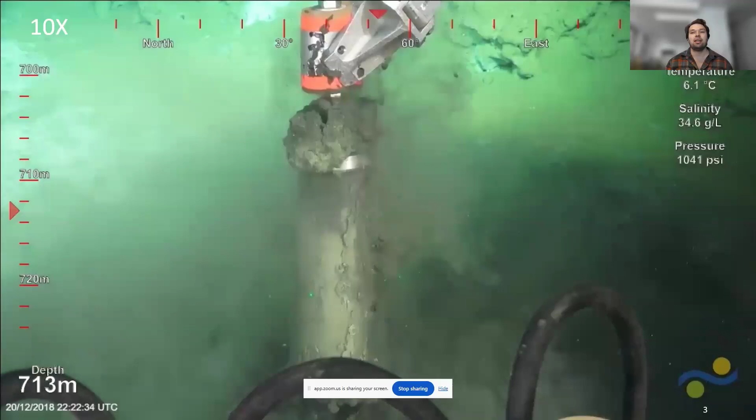But even this very simple task, you can see there's a lot of challenges for an automated robotic system. The dexterity required in the manipulator to pick up the tool, place it in the location of interest, and put it back in a very cluttered workspace. And also the act of sampling and interacting with the environment can kick up a lot of sediment and cause perceptual degradation that challenges automated systems.

Environments of interest are also often quite challenging by their nature. These are unknown environments going in - we don't have prior maps or knowledge of many of these environments, so we don't know what to expect. And often they can be structurally complex or visually complex, like this example here, where there's lots of bubbles coming off of this thermal vent. It's quite difficult from a perception perspective.

So there are many risks to deploying underwater robots compared to terrestrial systems. First you have the risk of environmental disturbance - that could be disturbing a delicate environment, but also the risk that disturbing the environment degrades your operational environment and makes it challenging to even operate. There's the risk of vehicle survivability. If something goes wrong, the vehicle can end up at the bottom of the deep ocean with no real way to recover, or imploded, with no possibility of recovery.

And then there's also risk of mission completion. If things go wrong, you may not complete your scientific goals for the mission. Many of these scientific expeditions are years in the planning, with very fixed ship time available, very expensive. And so if you don't get what you need out of it, it's a huge loss.

Compared to terrestrial systems, hardware underwater is very expensive to build. Operations are much more expensive. The observation of your system while it's deployed is very limited - you can't just look under the water and see what your system's doing. Again, hardware is prone to failure. Water is corrosive, at least marine water is, and these are high pressured environments. So it's not if things will fail, it's when things will fail.

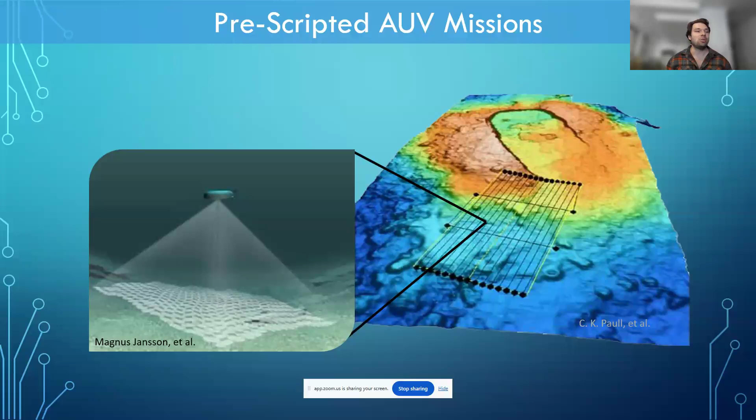Then you recover it and evaluate what went wrong with the system. So that leads to this general golden rule within marine robotics that first and foremost, number of deployments should equal number of recoveries. That's what we emphasize when we do field deployed robots.

So when you think of the design of underwater systems, they tend to be designed within an application-centric approach, where vehicles are highly specialized for what their intention is. When you break that criteria down, you tend to arrive at two very distinct types of systems: autonomous underwater vehicles, which tend to be hydrodynamically efficient, designed for doing survey, and intervention systems that are designed to operate by a tether from a ship with pilots in control of them.

However, if we're designing vehicles for exploration of remote or extreme environments, it requires a bit more of a hybrid approach, because you cannot rely on a tethered vehicle to go and collect samples very far under ice or on an alien world. And you also cannot rely on very strict, rigid, mission-planned regimes to operate if something goes wrong in an environment where you cannot surface or recover.

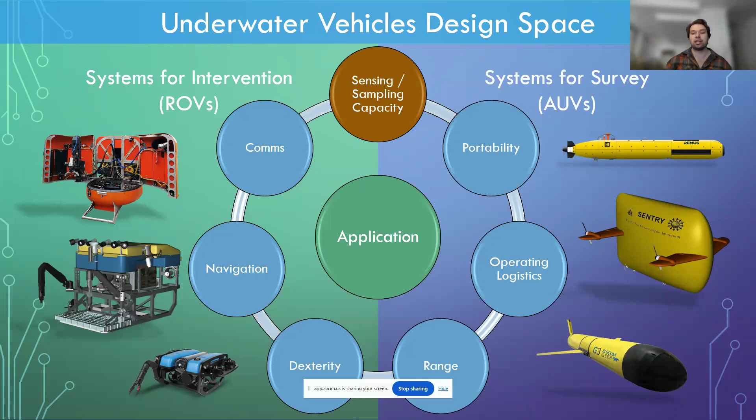So this leads me to the project that I alluded to that started all of my marine robotics research, which was this NASA-funded PSTAR project that I was offered to join at the beginning of my PhD. This was a collaboration between my home University of Michigan, the ACFR, which is how I was first introduced to the marine group here, Woods Hole Oceanographic Institution, and MIT.

And so this PSTAR program funds terrestrial-based research towards developing technologies that can enable future space exploration missions.

NASA is interested in this because one of their primary goals is to search for life outside the bounds of our Earth. In our deep oceans, we have these thermal vent systems, which I've alluded to before, and these vent systems are driven by geothermal processes in the core of the Earth, which cause chemical vapor, hot vapor, to come out of these vents in the deep ocean.

There's a kind of bacteria that lives on these vents that was only discovered within the last century. Instead of relying on photosynthesis, which most of the life we're familiar with does, they can fixate carbon dioxide directly from these vent systems into energy, through a process called chemosynthesis. Those bacteria in turn support a whole pyramid of life that thrive in the deep ocean where no light can penetrate.

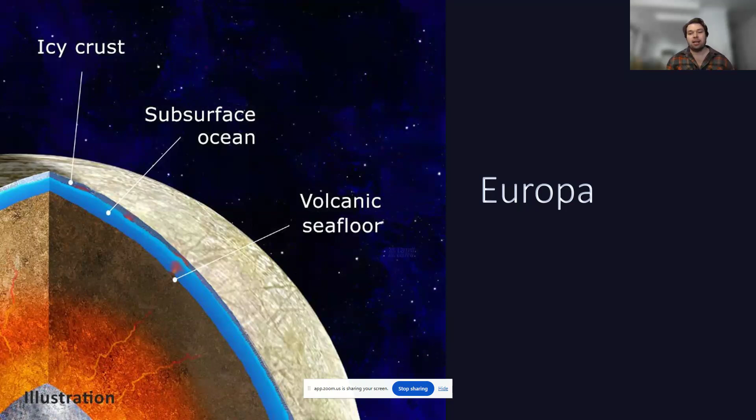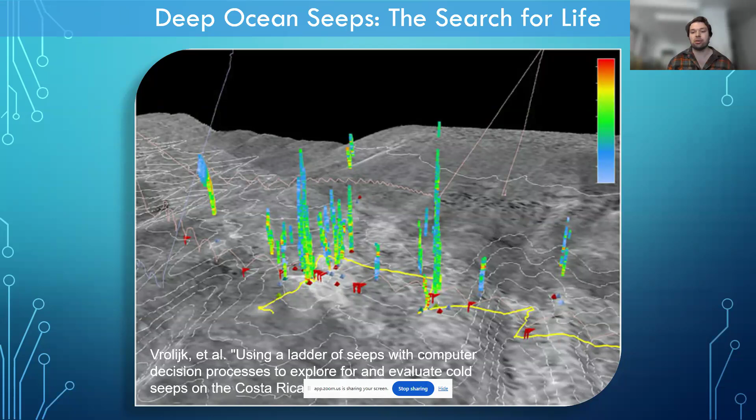So my work as part of this project was really focused on increasing the autonomy of an ROV system as an analog to a lander. In an environment like Europa and Enceladus, there is no way to do any kind of direct control of the vehicle. It's going to be on its own. So it needs full autonomy capability.

So I worked largely through my PhD with this kind of specialized ROV system called NUI, Nereid Under Ice. Traditional ROVs use a tether for both power and communication. So they're tethered to a ship with a very thick tether. And then to minimize the dynamic loading between the ship and the vehicle from the tether, the ship has to station keep directly over the vehicle. So this limits traditional ROVs, large ROVs, to operating in open ocean areas where ships can access.

The NUI vehicle is a hybrid ROV that carries all its power on board. And instead of a large tether, it only has a hair-thin fiber optic tether that spools out between the ship and the vehicle and just supplies communication. So it can still be teleoperated, but because it's a hair-thin tether, it can spool out for kilometers and the ship can stay in place and the vehicle can move away from the ship.

The kind of design inspiration for this vehicle was to access under ice shelves and start to be able to kind of get under there and collect samples and do some intervention. So this vehicle can operate in an AUV mode. So if the tether breaks, it can home its way back to the ship. And there's also, you can do some level of wireless communication through optical and acoustic modems.

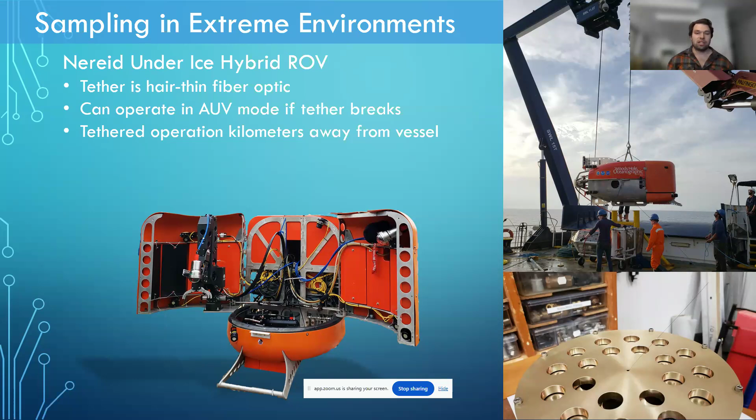All right, so a massive challenge for automating underwater intervention systems is the perception problem, which is my particular interest. The image formation process in underwater environments is nonlinear. It's subject to many degrading imaging effects. And again, operating intervention systems in close range to the environment also risks environmental disturbance and degrading your scene.

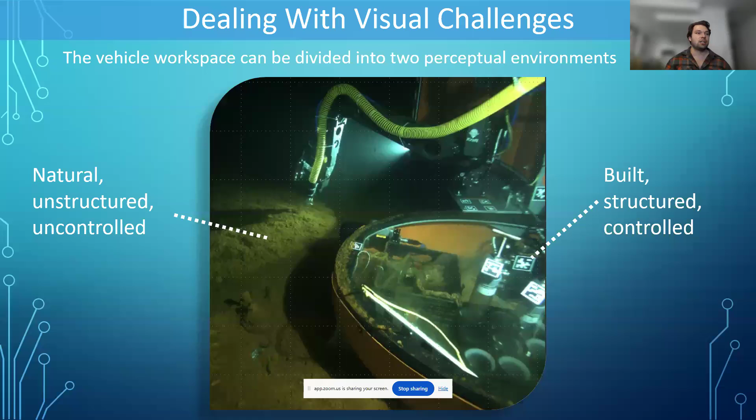Within the scope of this project, I worked on several different vision problems. So I'll kind of briefly talk about some. But an idea I leveraged heavily within my work is that your workspace can kind of be divided for an intervention vehicle into two perceptual environments. So you have your unknown environment, which is generally unstructured, uncontrolled, and highly uncertain, in an unexplored and new location. And then you have your known environment, which exists within your structured and controlled workspace of the vehicle. And within that controlled environment, we can also have prior models of things like tools and your vehicle itself.

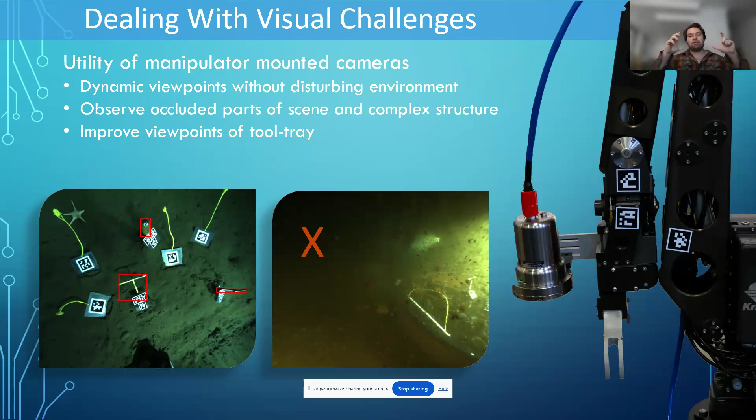And then a second idea I explored in my work is the use of manipulator-mounted wide field of view fisheye cameras. So wide field of view can enable dynamic viewpoint acquisition without needing to move the vehicle around, which for large ROVs was a big advantage because the thrusters on large ROVs, if you try to lift up and move location, they completely degrade the whole scene. You have to wait minutes for the sediment to settle down. And also that manipulator-mounted camera proved to be advantageous for detecting and grasping tools within the confined space of your workspace, where vehicle fixed mounted cameras don't see your workspace very well.

So just very briefly, I'll go over a few of the problems I worked on within this context.

One of the first things I worked on was an object pose estimation method specially adapted to underwater use, which I called SilhoNet. This method would predict silhouettes, essentially a segmentation mask of the object. But if the object was occluded, it would fill in the silhouette to be the full silhouette of the object in its current pose, which could then be used to estimate the orientation of the object. This proved to perform very well compared to methods at the time.

It ran on top of an object detection method that could take a region of interest and a class ID as input. This method was inspired by having known prior models of your tools within your workspace that you were trying to detect and manipulate.

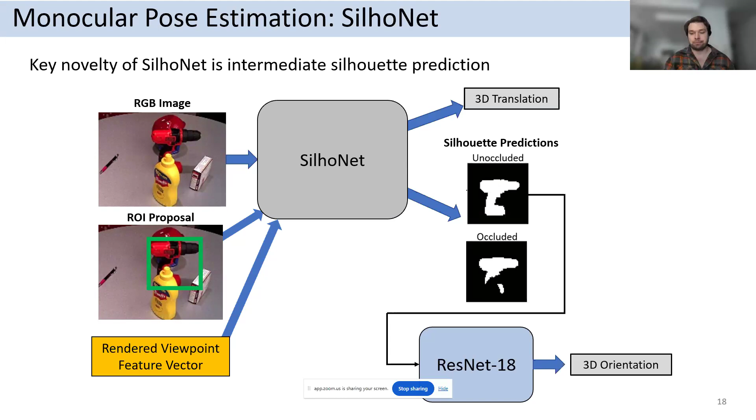I then took that work and extended it to work on fisheye cameras, for cameras mounted on a manipulator with underwater imagery. One challenge with fisheye imagery is the large distortion space. If you take an object and translate it without rotating it, then take a region of interest crop around that object, the apparent rotation will look very different depending on how you translate it. This was a challenge for traditional pose estimation methods, which try to predict directly the orientation relative to the camera frame and the translation.

In this method, I used the gnomonic projection, an old mapping used for navigation maps, to map onto a sphere what I called an apparent viewpoint of the object. I could then do object detection and pose estimation within the frame of that apparent viewpoint, and then do an inverse projection back to the fisheye frame to get your camera-relative pose and orientation.

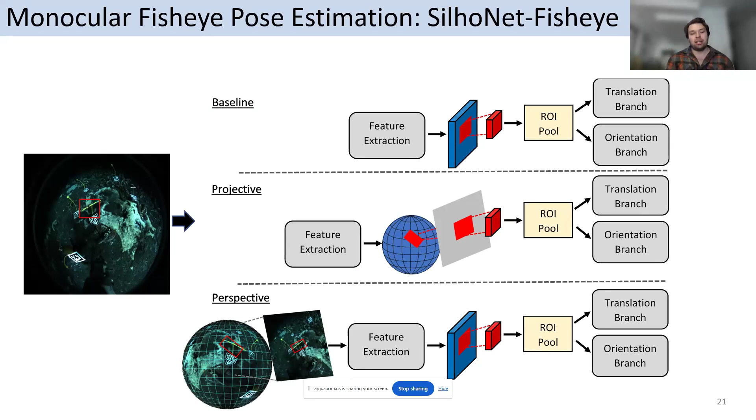I did some analysis of different ways of using that gnomonic mapping operator within a neural network architecture and found an approach that performed best. As part of this work on the Costa Rica shelf break, I collected a dataset. Nowadays it would be considered very small scale, but it was enough to train the method on underwater fisheye data and evaluate it, showing reasonable performance for grasping and manipulating objects.

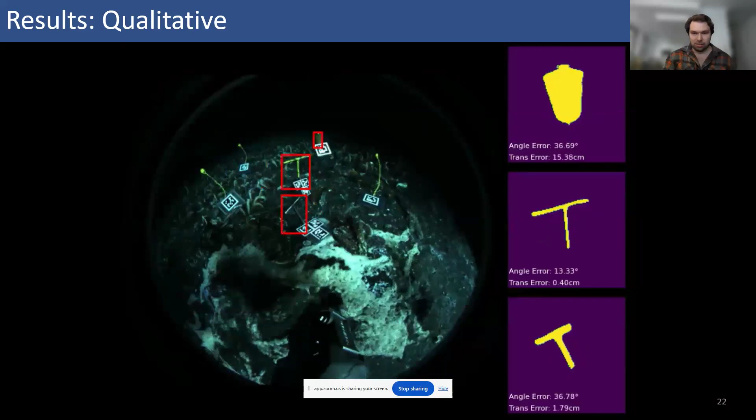That was one problem I worked on during my PhD. Another problem I looked at was how you can co-register cameras mounted on the vehicle with the camera mounted on the manipulator. On the vehicle, we had perspective regular stereo for good depth maps, but with a limited viewpoint and strong features, and then the fisheye camera on the manipulator, which is a much different camera model.

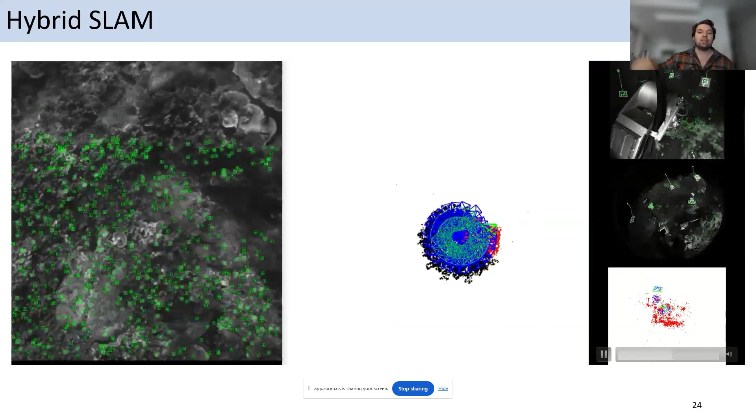Here's a little video snippet of that working. On the left is a stereo sequence from Lizard Island that we collected, used for preliminary evaluation of the method. On the right, it shows the mapping from a deep ocean dataset where the fisheye is being registered into the stereo view. On this large vehicle, the stereo is pretty much stationary since you're not moving the vehicle around, but the fisheye is able to extend the view and see around the occluded spaces of the scene where the stereo can't.

So that was a couple things I worked on the perception side. On the hardware side, at the same time, I worked on building an autonomy framework that could seamlessly integrate with the teleoperated system that the pilots use. This framework could enable an operator to assign high-level pick-and-place style tasks, with execution broken down into sequences of motions that could be visualized to the pilot. They could override them and verify they were safe, which reduced the risk of testing and deploying this autonomy stack on a very expensive vehicle asset.

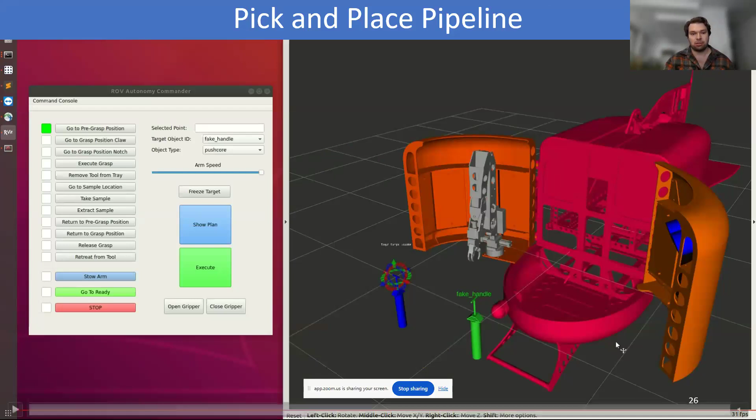So using this, this was the very first basic thing that I did, a simulation, a pick and place pipeline. Part of this was to build a pipeline specialized to underwater tools, and also keep very transparent the things a pilot would want to know was happening in an underwater system.

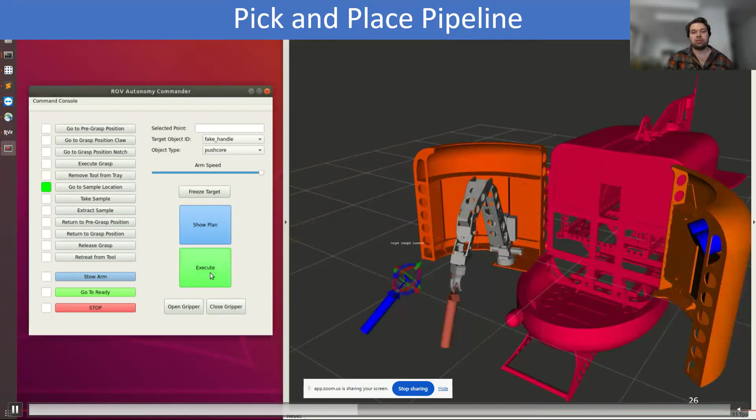This was a preliminary simulation leveraging MoveIt to build this system to do push core sampling, which was the first task that we tried to implement.

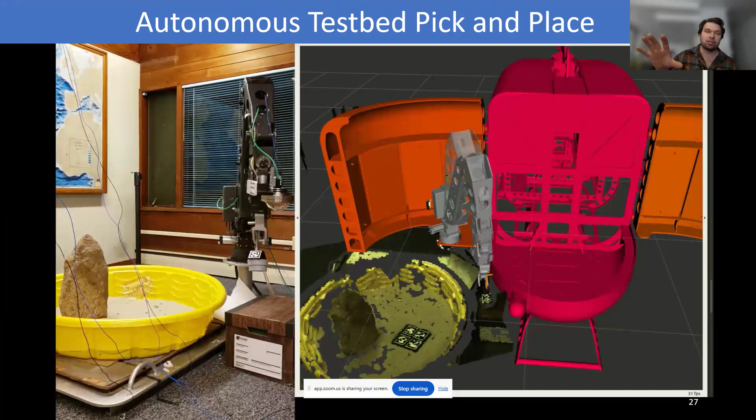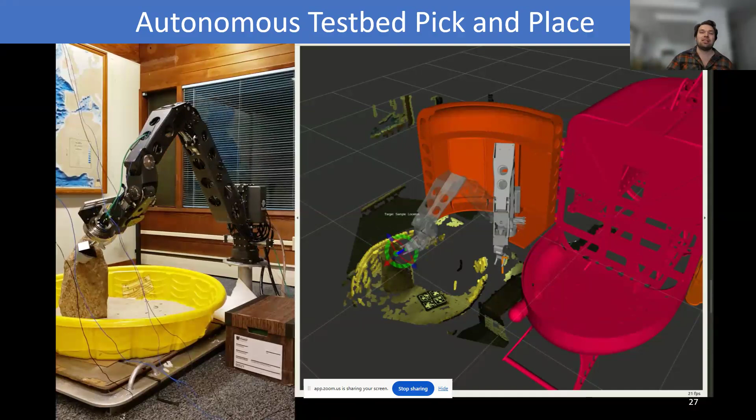This was the first demonstration of the full pick and place pipeline working in a lab setup. It had a very simple setup, but this was also all done on a hydraulic manipulator built in the 70s, not built for automation at all, so there were a lot of control challenges around getting the accuracy needed to actually automate this thing.

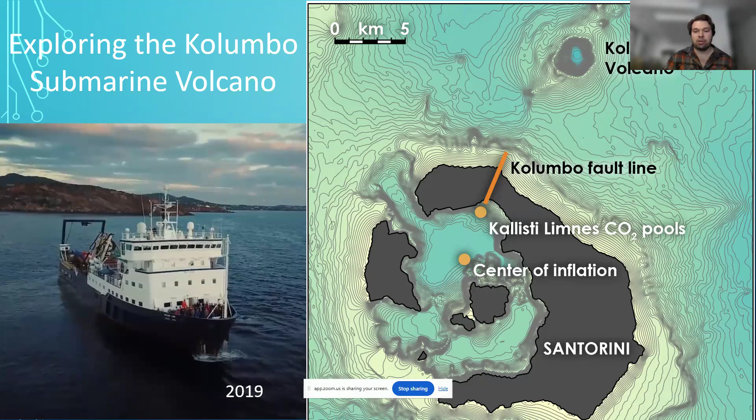In 2019, I participated in a field expedition where we used this vehicle to explore the active submarine volcano Kolumbo, a volcano off of Santorini in Greece, and we were able to demonstrate planner-controlled biological sampling at 1,000 meters deep.

Unfortunately, as is always the case in field work, the manipulator's slew joint, the rotation joint, was having issues, so we couldn't precisely control the manipulator. But we were still able to get published first, with a planner controlled collection of a material sample using this slurp hose, which is kind of like a large vacuum cleaner. There was no pilot in the loop - we just pressed some buttons and had the manipulator collect a biological sample.

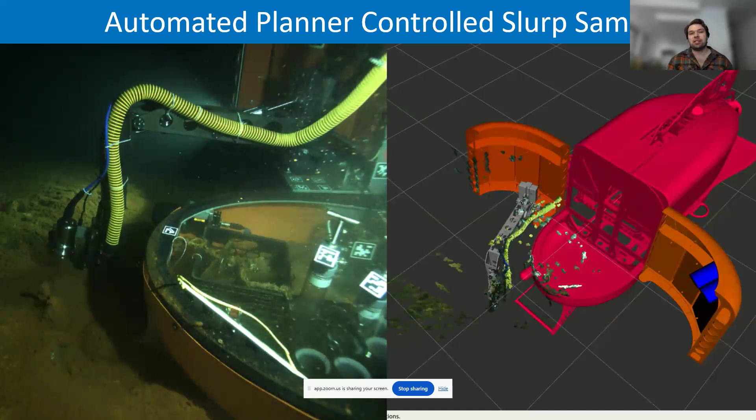You can see here an example of the challenges of these kind of environments. The whole seafloor in the caldera is just thick bacterial mat, and anytime you try to collect a sample it just kicks up tons of sediment, which made the visual side of things very, very challenging.

We also did a very preliminary demonstration of natural language control of this system. In collaboration with Matthew Walter, who's at Toyota Technological Institute at Chicago, we demonstrated a natural language interface that allowed you to put text commands or speech commands to the autonomy system, and it could essentially reproduce any of the pick and place pipeline commands. That was preliminary work during my PhD.

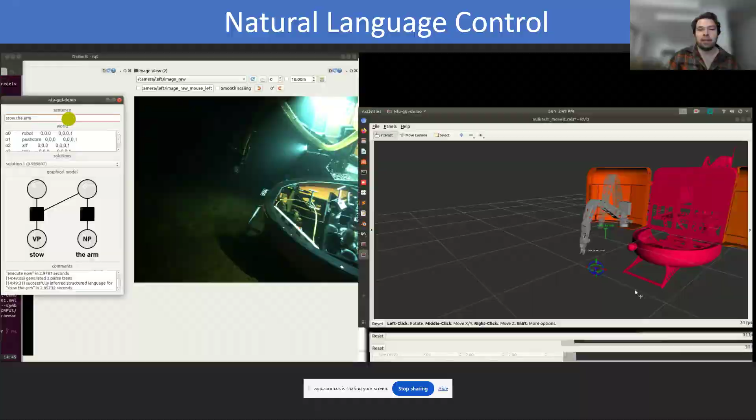Towards the end of my PhD, and then in my postdoc at Woods Hole Oceanographic Institution, we started extending this work. A big challenge for conducting deep ocean science is that currently vehicles capable of operating in the deep ocean are very few, and they typically require large ships to support operations.

The cost of operating these vehicles is generally on the order of 50 grand or more per day. The berth spaces available on these ships are very limited, and you also have a very tight operational window to collect your data and samples. This motivated expanding this autonomy framework to a system that could enable any number of both ship-based and shoreside scientists to engage with the vehicle operation in real time. Rather than just waiting on shore for the mission to be completed, you can be actively engaged with the process of collecting those samples.

So we built a networking framework around our core autonomy system. This had a 2-server architecture where we had a field server that interfaced directly with the vehicle's autonomy framework. The vehicle ran ROS, and then that field server encoded data into a lightweight messaging library, ZeroMQ if you're interested, and then that was transmitted to the shore server.

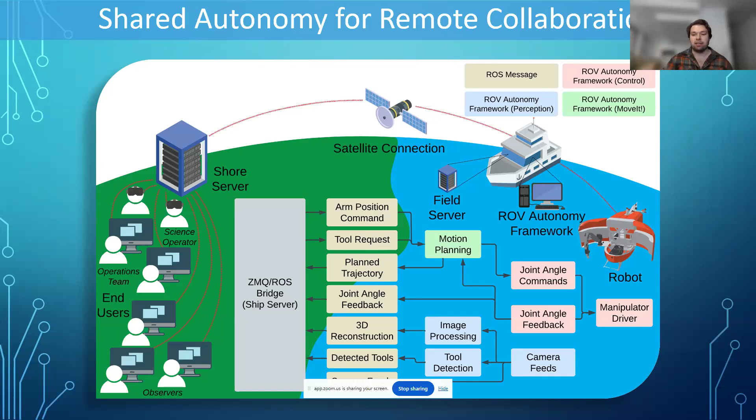In 2021, we took this system and demonstrated it in a field expedition off the west coast of the US in California. Myself and Matthew Walter were on the ship, and we had a team of others involved in building this system: Andre Daniello, Amy Phung, and Dr. Richard Camilli at Woods Hole, who was leading this work.

In 2021, we had developed both a desktop interface and a virtual reality interface into the system. Our major emphasis was on the development of this virtual reality interface, which supported both hand gesture input and natural language commands. The demonstration was a multi-step collaborative sampling task where we used a device called an X-ray fluorometer, which Richard Camilli developed, that could measure the elemental composition of materials in real time.

In this demo, Matthew Walter initiated an automated pickup of a tool command using a spoken command. Once the system grasped and removed the tool, Amy Phung, using the VR interface, was able to position it precisely where we wanted to collect the sample.

And then in real time, Rich Camilli was able to look at the data coming through the XRF and give feedback on where the tool was positioned. Then we were able to finish the sampling process and recover the tool with no pilot in the loop. This was all controlled by people thousands of miles away from the system.

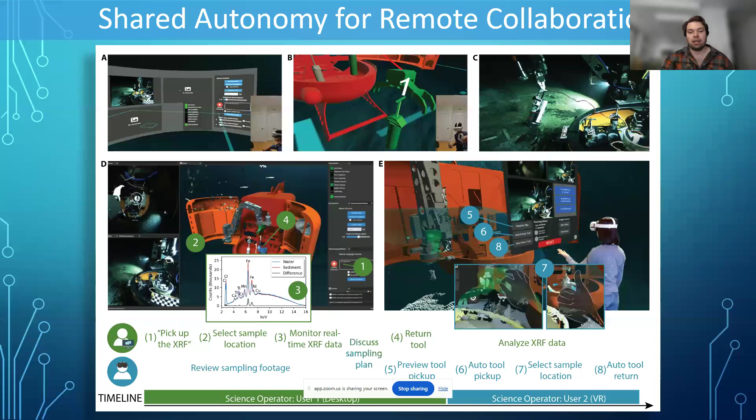So that was a pretty cool success. So then we took the lessons learned from that and improved the virtual reality interface. And then we set up some trials at the lab where we could conduct user studies to evaluate and demonstrate how novice users could operate the VR interface with precision enabled by the autonomy framework. So this is just an example of that VR interface and what that looked like.

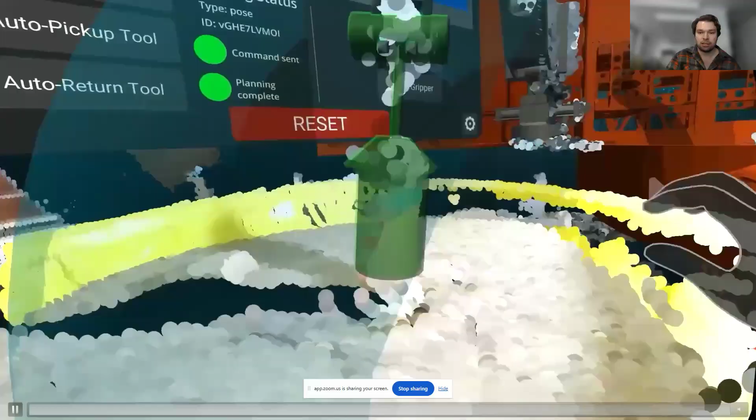So we conducted a set of user studies that involved two representative tasks of things you do with an underwater system. One is picking up a block and putting it in a basket, like collecting a rock sample. The other was taking a push core out of a quiver and trying to place it in the center of a target, then putting it back in the quiver. We evaluated how accurately the user could position the push core on the target.

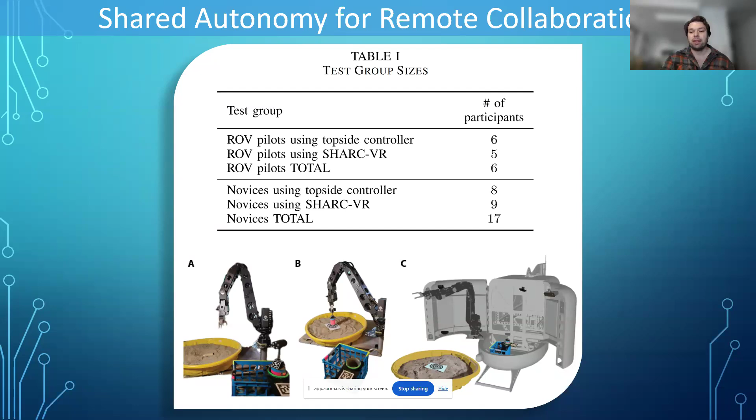We had a pool of users that included both expert pilots from the Woods Hole Oceanographic Institution, who had lots of experience controlling underwater manipulators, and also a pool of novice operators who had never seen or touched an underwater manipulator before. These were time trials.

The big takeaway from this was that under reduced frame rates, represented by delay or bandwidth limited communication, we found there's an exponential increase in the expected time for both novices and pilots to complete a task as your frame rate decreases.

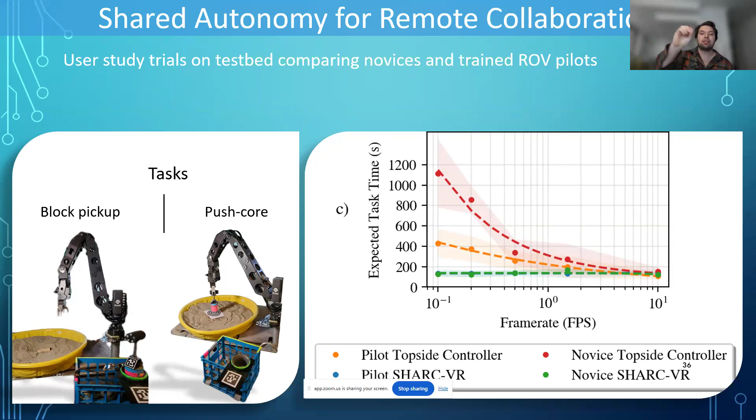This result was consistent with Sheridan's observation 60 years ago, where he noted that under delayed communication, users directly teleoperating a remote system tend to opt for making small open loop adjustments and then waiting to see the response of the system before making another iterative adjustment. Whereas with the autonomy system, it's able to close the loop in a delayed communication setting, so you don't need to make those iterative adjustments that lose time.

We also found that both novices and pilots were more precise with their push-core sampling than with the direct joystick operated approach to manipulation, the traditional approach. And I also found that my aunt could operate it very easily and with very little training.

Okay, so that wraps up my discussion of that first project funded by NASA, towards automating these underwater intervention systems. We're still doing a lot of work currently building off of that, and I'm actively involved with several projects here at the ACFR in that space. So now I'm going to move towards talking about another project I got involved with during my postdoc at the Woods Hole Oceanographic Institution.

This project was motivated by long-range exploration under ice. Currently, we don't really have good systems that can go fully under ice shelves. There are a few, but in general you require a vehicle with very high range. We're talking, we don't want to just go 10 kilometers or even 100 kilometers, we want to go 1,000 kilometers under ice. There are very few systems that can do that.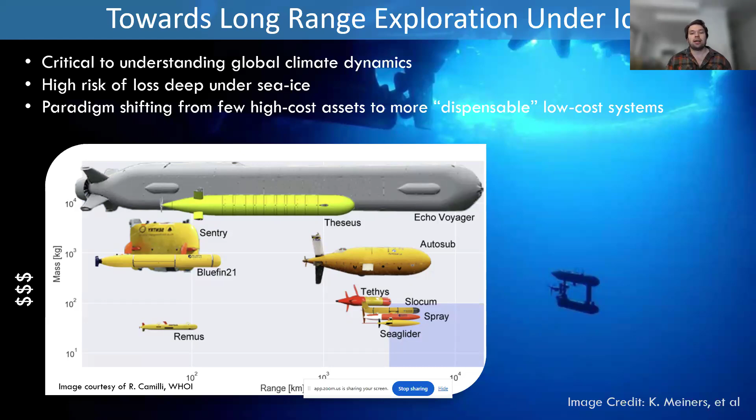...are not very big, but can go super long range, and those are gliders. If you're not familiar with gliders, they're a special type of autonomous vehicle that can fly essentially through the water column on wings, using buoyancy drive instead of thruster drive as their primary propulsion method. Gliders can go both positive or negatively buoyant, and traditional ones can go 1,000 meters or more in water depth, gliding in a yo-yo kind of pattern through the water. That means gliders only need to burn energy when they change their buoyancy at the bottom of an inflection to go positively buoyant. So these vehicles can go super far and operate for very long duration.

Because they're so power efficient, and still limited in battery capacity from their size, gliders tend to operate very low power sensors that can be turned on and off. Traditionally, gliders constrain their navigation by getting GPS fixes at the top of every yo cycle: start with a GPS fix, do one long dive through the water column, come up, grab another GPS fix, and that constrains their navigation drift.

There's been more interest in leveraging these vehicles for long-range exploration under ice, but that breaks the traditional way you operate these systems, because under ice you can no longer surface for a GPS fix. You also end up depth constrained—if you're under the keel of an ice floe, you may not have full water depth for an efficient yo cycle. So it requires a system that can navigate accurately enough to get under the ice and back out without surface fixes, and also fly in narrower depth bands depending on the keel depth of the ice.

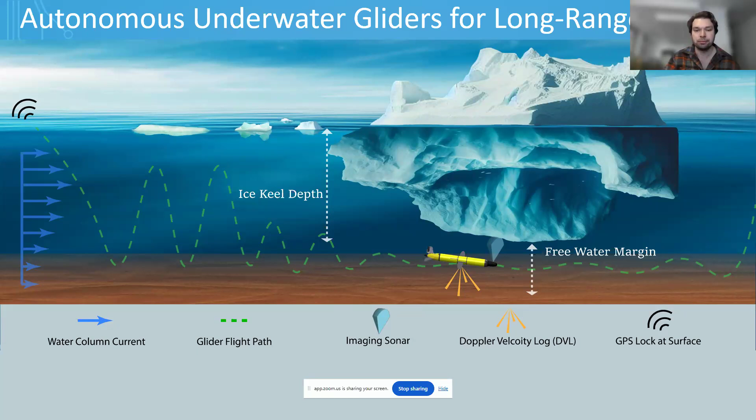In this project, I worked with Dr. Richard Camilli on developing this long-range underwater glider, modified from a stock Slocum G3 glider. He did some work modifying the wings and tail of the glider so it could fly more efficiently, and also built a custom thruster more efficient than the stock thrusters. So the glider was able to operate in hybrid mode, seamlessly transitioning between buoyancy drive and thruster drive.

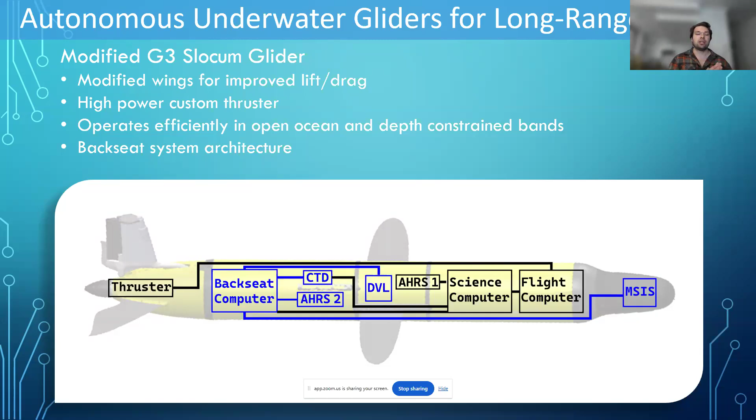We built this backseat architecture system that could interface with the flight computer, so you could fly the glider as a stock system or leverage this backseat architecture. That backseat had a DVL, a mechanical scanning sonar in the nose of the vehicle, a CTD, and an AHRS—those were the key sensors we integrated into the stock system.

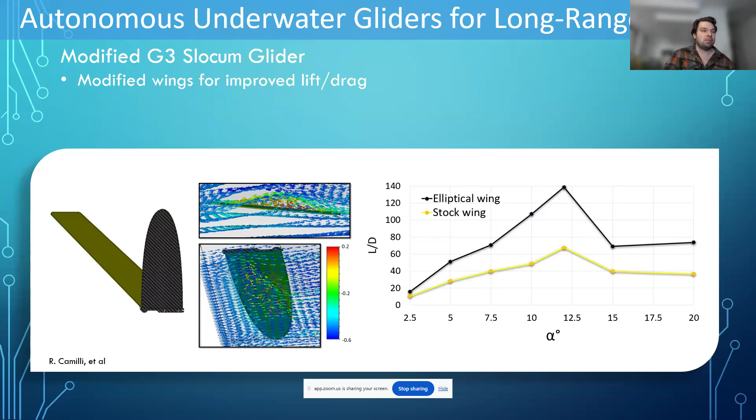This graph shows the improvement of the flight dynamics from the modifications. A simple modification to the shape of the wings significantly improves the lift to drag ratio. Again, everything on gliders is about improving efficiency and minimizing power loss.

Richard Camilli did some analysis on the different operation modalities for gliders. What we found is if you're in full ocean depth with low hotel load, meaning you're not operating many sensors, just collecting sparse oceanographic data, then you're most efficient flying with buoyancy drive, yoing through the water column. However, if your depth band becomes constrained to less than 100 meters, actively cycling your buoyancy drive becomes less efficient than just driving by thruster with neutral buoyancy.

If you start operating a hotel load of sensors—say you want to run the DVL and mechanical scanning sonar at 15 watts, which is actually quite low for a sensor hotel load—then the depth band where thruster operation becomes more efficient extends to 300 meters. So gliders are most efficient when they can leverage the full ocean depth, but if you're really interested in operating in a constrained depth band, you want to use this hybrid thruster modality.

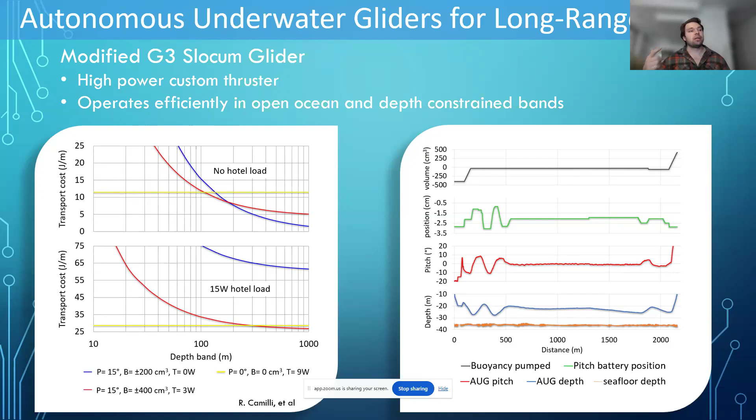Based on our stock glider modifications, we ran some numbers where we looked at transit mode—coastal transit mode, where all unneeded sensors are turned off and just navigation sensors run—and survey mode, where you're running the mechanical scanning sonar and all sensors you want to collect data with. What we found is that with full sensor payload, we could get a range of 1,500 kilometers in a constant depth band, thruster-driven mode.

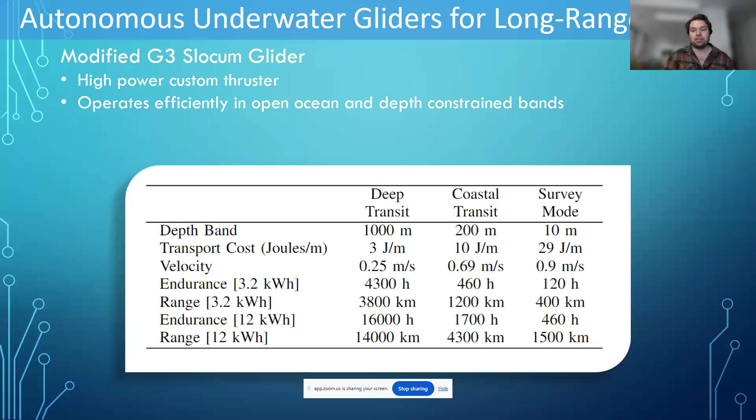It used a very simple ROS system implementing a navigation mode and a mission controller, which can communicate to the stock computer and update its mission parameters on the fly. I also worked on implementing a DVL odometry process that could dynamically profile the water column currents as the glider flew. Anytime the glider got bottom lock with the DVL, it could update its odometry estimate and correct for water column currents dynamically—since we're often starting the glider in very deep water where there's no DVL bottom lock, then flying closer to surfaces to do profiling and survey.

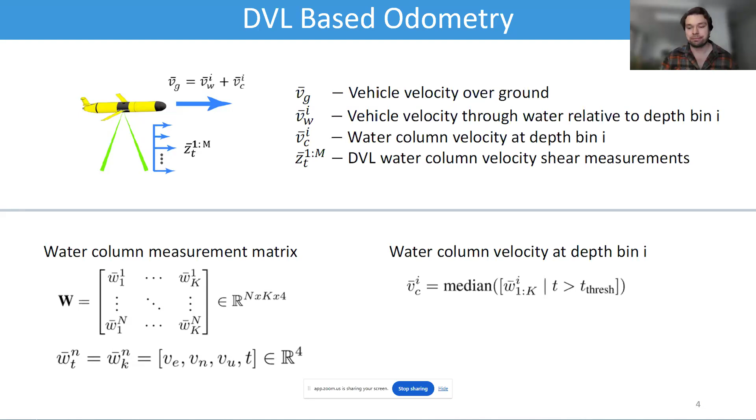For operation under ice, we had funding to do some operations in the Arctic, in what's called the MIZ, the marginal ice zones. One challenge was very little keel depth between the ice and the seafloor. We also needed a mission architecture that could safely navigate under ice and back out, where if something happened like an abort, the glider wouldn't try to surface under the ice and potentially get stuck. So we developed this backseat, front seat mission architecture that could handle abort cases under ice.

We implemented this carrot following approach to the mission controller, where the backseat ran this improved navigation stack that had a better idea of where the glider was based on this DVL odometry process. It would feed carrot positions based on the front seat's estimate of where it should go. It didn't touch the front seat's stock implementation, but it worked with it to fly the glider.

We spent 2 weeks in the Arctic out of northern Alaska, living on this boat with 5 other people. We used a kitchen pot as a shower off the back of it. And we conducted some surveys with the glider under the marginal ice zone.

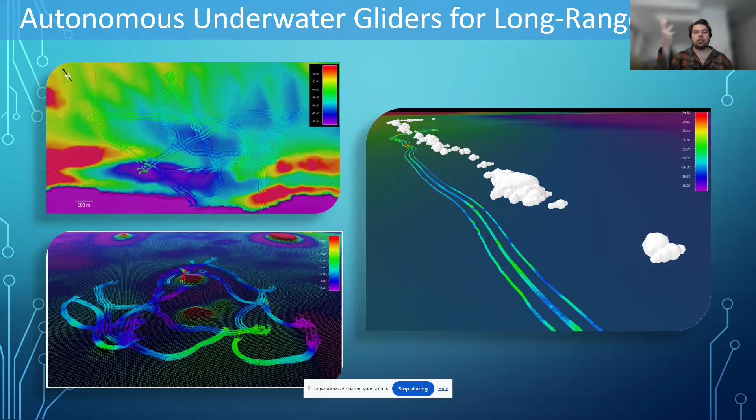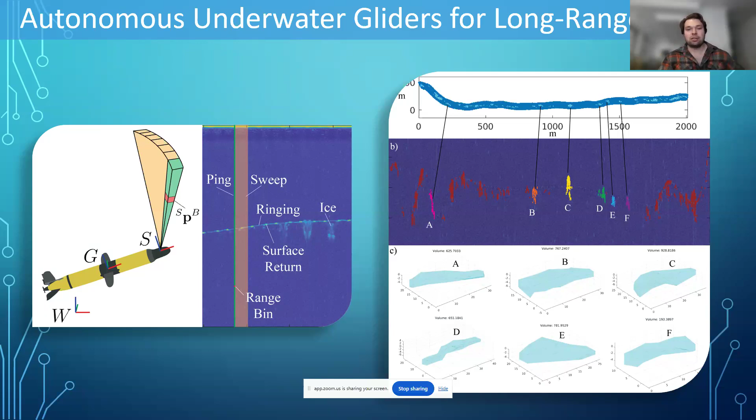We were able to show that when the imaging sonar was configured in an upward looking sweep, we could detect and characterize chunks of ice in the water. These graphs show the signal of the ice chunks in the sonar return. We were even able to integrate these signals into volumetric estimates of the ice cover. This was work that Amy Fung did, who I've worked with a lot in these past projects.

That brings me to the end of the 2 main things I wanted to talk about, the 2 main projects. But I'll just talk a little bit about what we're currently doing. This slide kind of captures a bit of my philosophy for how I think about the field robotics research that I'm doing.

I call this my subsumptive approach to perception for field robotics. It's inspired a bit by Rodney Brooks, who had this idea that intelligence is an outcome of levels of competence in a robotic system, which has varying views on whether or not that's actually proved to be legitimate. But I think these points really apply to field robotic systems, and I think of it instead of intelligence as autonomous capability.

For me, in my mind, field robotic systems should be situated in real time for real-time response to the environment where they're operating.

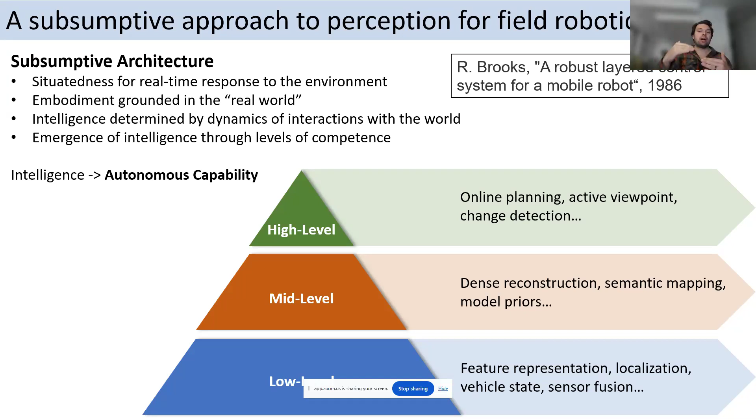Whenever I'm working on one level, I think about how I can leverage the levels below it. That leads to one of the problems that's been a big focus for the last couple of years with research that I've been doing here at the ACFR: how can you leverage your real-time sparse SLAM maps that you're building for dense depth prediction?

This was something that I was thinking about in my PhD. The idea is that your SLAM map provides you with very strong depth priors, and that can enable improved depth map, metric depth mapping from both monocular images or even stereo images.

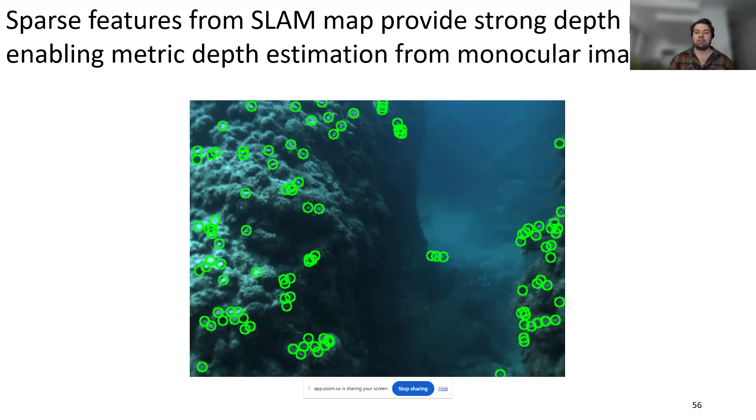I had a master's student that I was co-supervising 2 years ago, and he took this work and ran with it a bit. There was some recent work on monocular depth estimation coming out at the time. He looked at how you could represent these sparse depth points as a densified representation of a depth map prior, and then how you could fuse that into a metric depth estimation network using monocular relative depth plus that sparse depth prior map. He was able to show some really promising preliminary results.

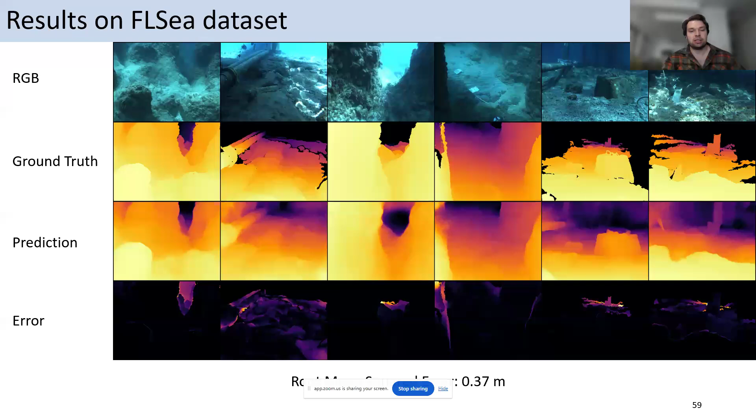Around the same time, ZoeDepth came out, which showed incredibly strong single shot performance on underwater data without any training on underwater data. And then you have Depth Anything V2, which came out, and you can give it a very turbid sequence where a conventional depth estimation method would be very poor, and it can actually put out something sensible.

This inspired some work that was done over this last year with a student that I'm co-supervising, Jay Zhang. We just submitted for publication this method called SPADE. This method is built on a monocular backbone like Depth Anything V2, and then it can leverage sparse feature priors, which can be from stereo or VINS or any kind of SLAM process. It can do a scaling operator on the second stage, and then have a third stage network that refines the depth prediction to produce a metric depth map.

We showed that this can run at 15 frames per second on a Jetson Orin, which is the kind of device that we're running on our vehicles. Very promising results for running real time on our underwater systems.

Another thing that we've been up to in lab that I've been heavily involved with is the Seeker AUV, which is a highly maneuverable AUV designed for benthic survey. We've been working on developing this vehicle over the last 2 years, and we've gone from prototype to having several vehicles built and operated all over the South Pacific, most recently in the Solomon Islands, where I did some field work for a month.

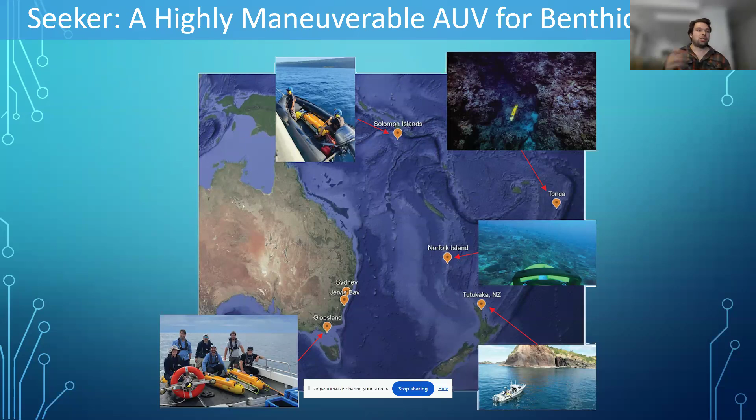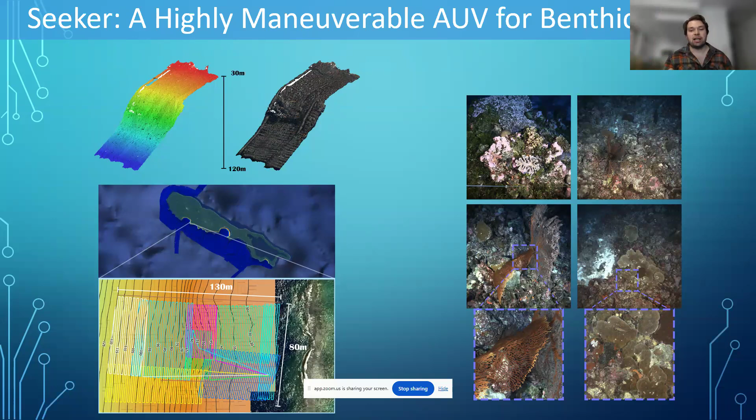We demonstrated with 2 vehicles doing, this is just one of the surveys that we did, a very large scale survey, doing benthic imaging, and then combining all of those imageries into a large scale photo mosaic. This photo mosaic is about 10,000 square meters and extends from 30 meters deep down to 120 meters deep. This vehicle has been designed specifically for high quality imagery.

The lighting and the imagery provides very high resolution and detailed images. One of the things with this vehicle that also fits with the depth mapping work that we're doing is obstacle avoidance problems. Currently this vehicle leverages just a very simple narrow beam forward facing sonar that can tell you if there's an obstacle in front of you, and it will try to go up and over the obstacle. But when you're working in very rugose and complex reef environments...

Overhangs and caves are a big risk, and currently it's very difficult to detect and handle that kind of environment.

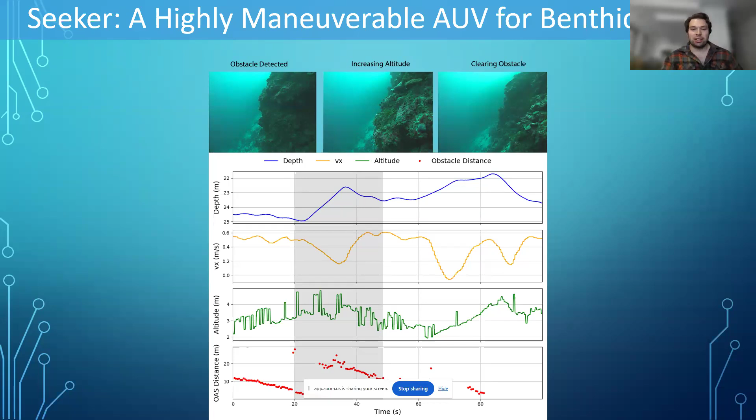So what we're working on now is extending that depth mapping work to run on a vehicle like the Seeker, with forward-facing camera plus scanning sonar, and leveraging that to do obstacle avoidance planning and also detect caves and more complex terrain. That's one of the problems we're working on. There's several others, but that's what I had time for today.

So that brings me to the end of my talk. Hopefully there was some interesting stuff there for you.